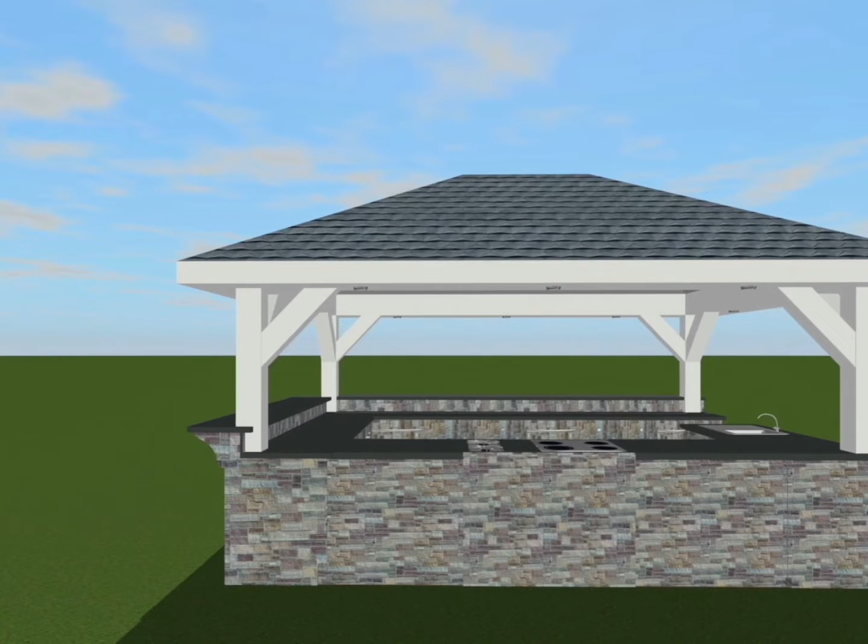In this video, we will teach you how to build an outdoor kitchen. Here's what you should do to create a similar kitchen project.

Open the 2D plan view. Draw 4 walls using the Room or Straight Wall tool. Select these walls and assign to them Porch-type properties using the Object Properties tab of the inspector.

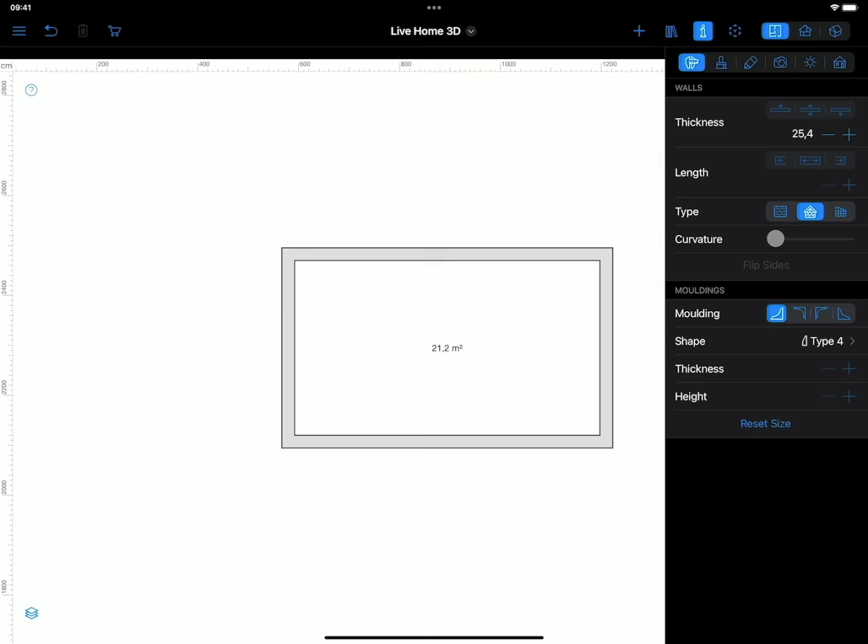Add a roof on the current story. A hip roof will do. This can be done both with the Auto Roof or Custom Roof tool if you have the Pro version. Set the roof elevation using the Inspector Object Properties tab. Do not confuse this elevation and the elevation of the floor in the Building tab.

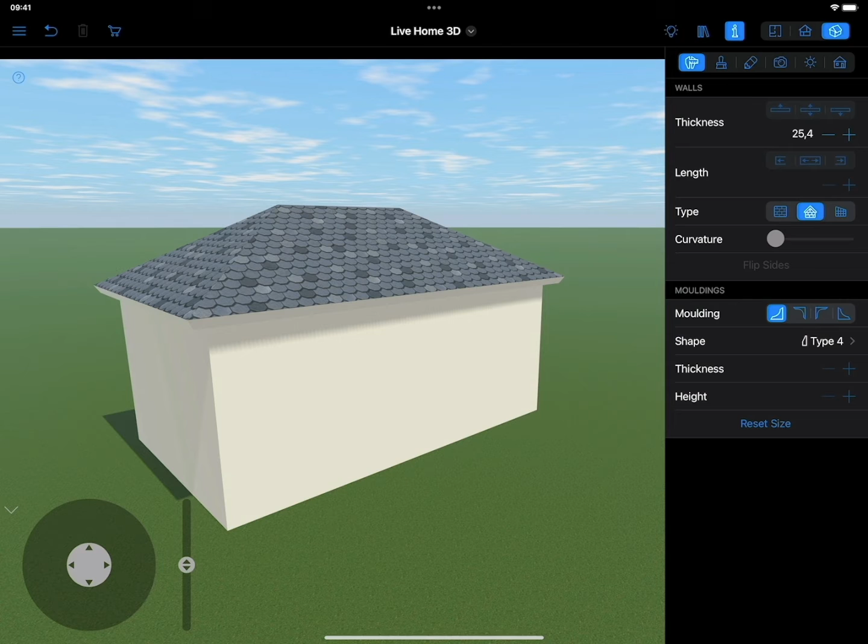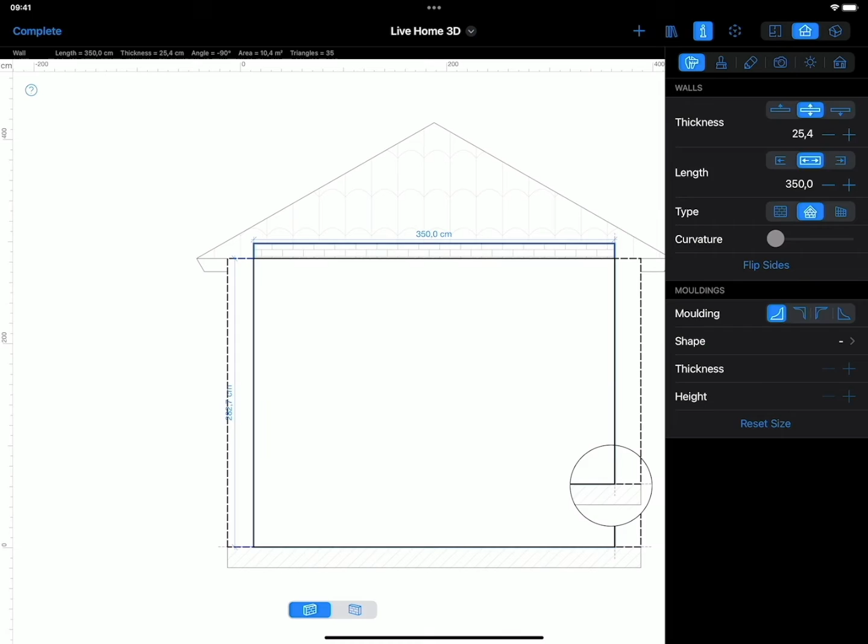Create big openings in the walls. Users of the Pro Edition can do this in Elevation 2D view, while Standard Edition users may use openings from the object library.

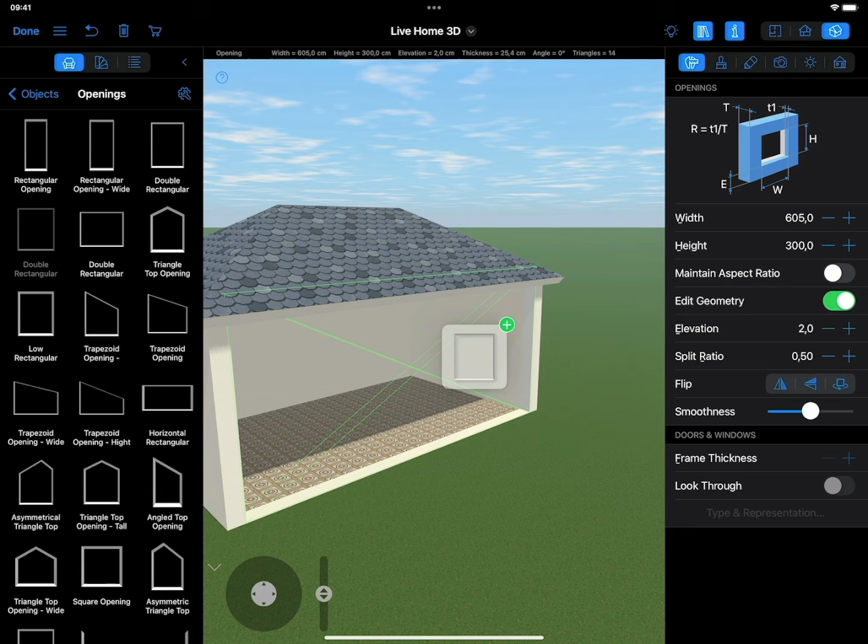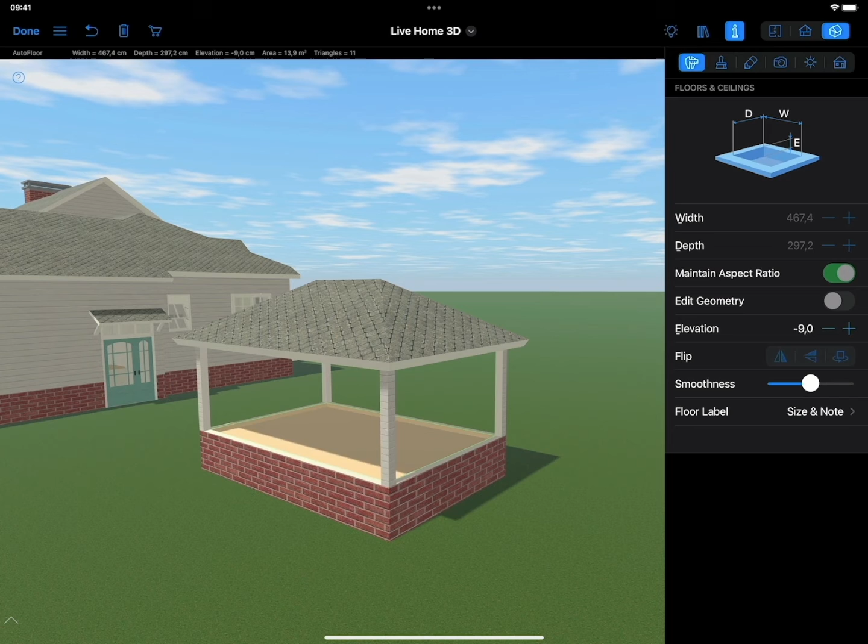Note that the kitchen foundation may need to be lowered to the ground level if you have other structures with a certain foundation height on this level. To do this, select the floor of the kitchen and set a negative value for its elevation using the Object Properties tab of the inspector.

Adding beams is quite simple. Add a building block or a shape from the library.

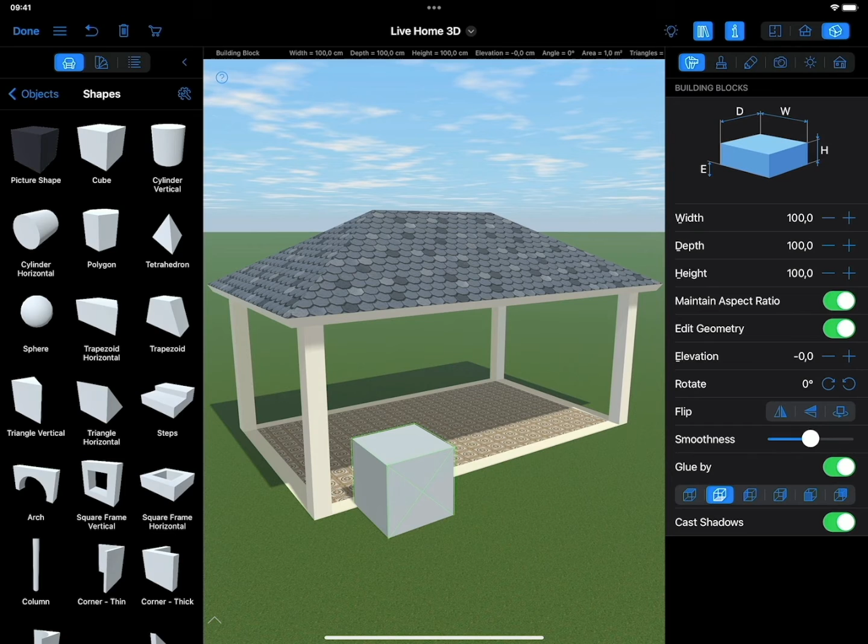Tap on the model and select Merge option in the dialog that appears. It will assign the furniture properties to an object. This step is important if we want to rotate and incline beams.

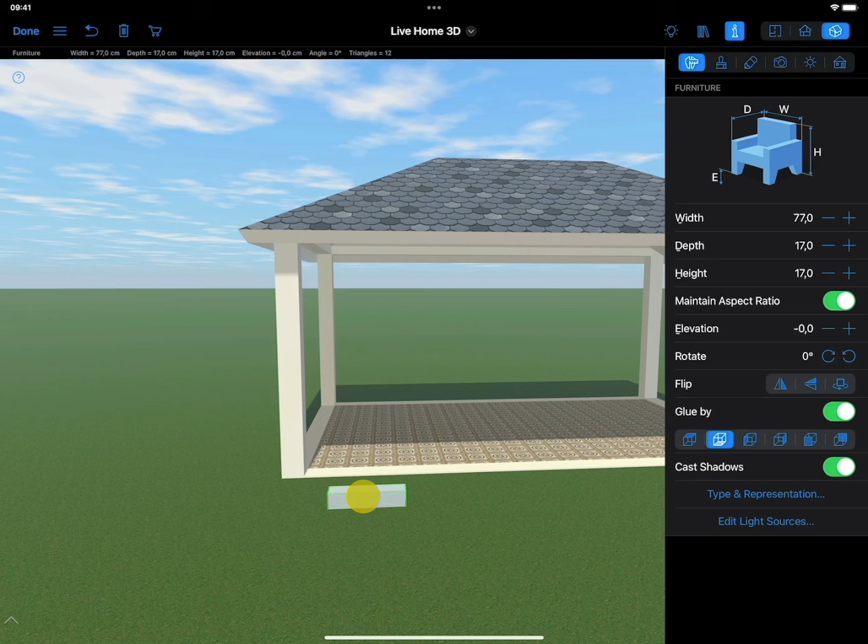Now rotate the beam and give it the necessary inclination using the Type and Representation dialog.

Place the created item to its position. Repeat this step until you have all necessary beams in place. You can copy and paste previously created beams to speed up the process.

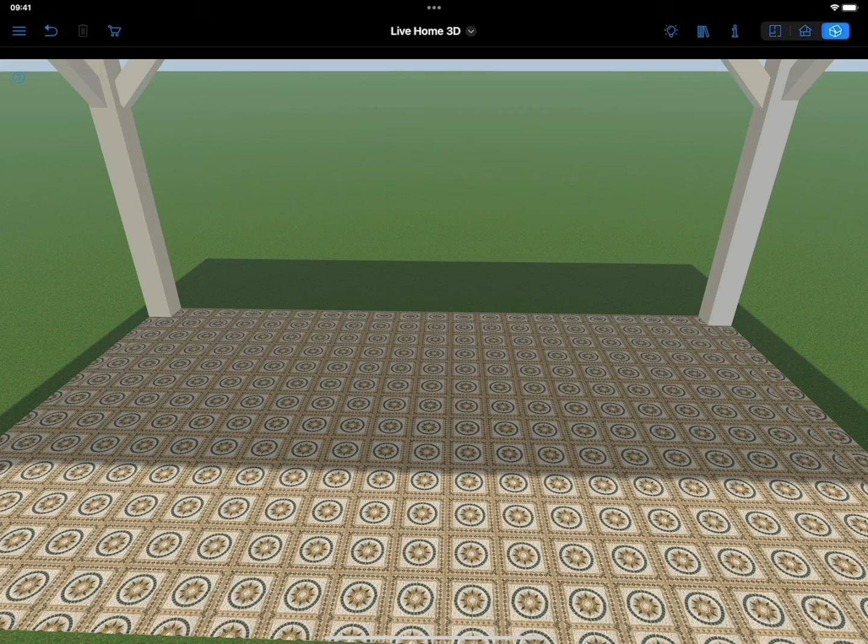Making the frame for a roof is the most complicated and time-consuming part of the job. Once we're done with the roof, we can add kitchen items from the Object Library or Trimble 3D Warehouse. The latter contains thousands of ready-made outdoor kitchen sets.

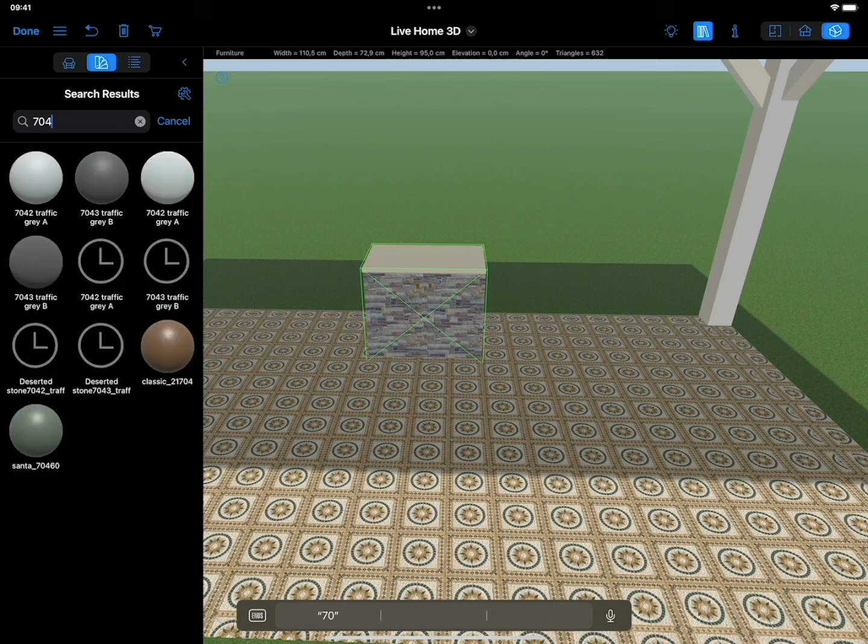The final touch is to paint the back part of each unit by applying the necessary material from the material library. There is also another faster way to add an outdoor kitchen to your project.

You may simply use Garden Pavilion from the Object Library, or even download the whole kitchen model from Trimble 3D Warehouse. But in this case, you're limited only to available models. There's not much room for creativity in such a case.